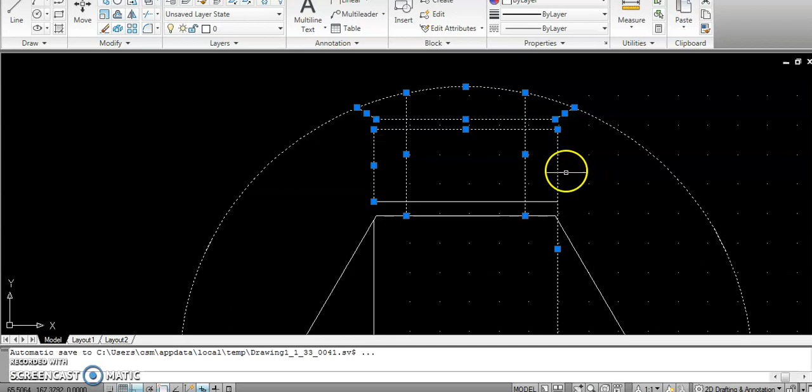So now almost everything we have trimmed. Then here few things are left out. See, this is pole face, right? So this is pole face. Then this also you can remove because we are trimming it, right? Okay, then anything else? Fine. Okay, this is not required. Trim.

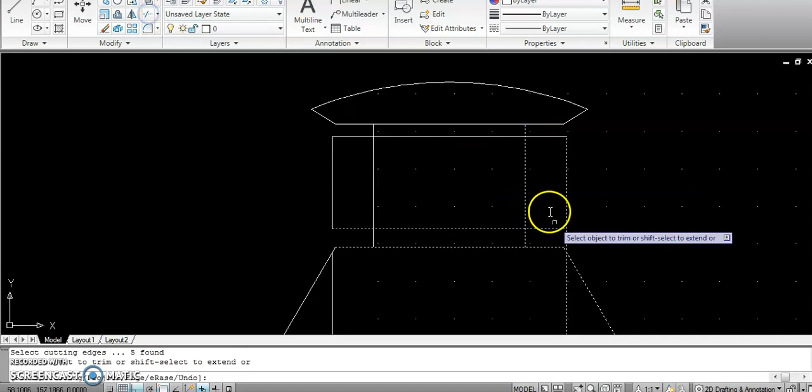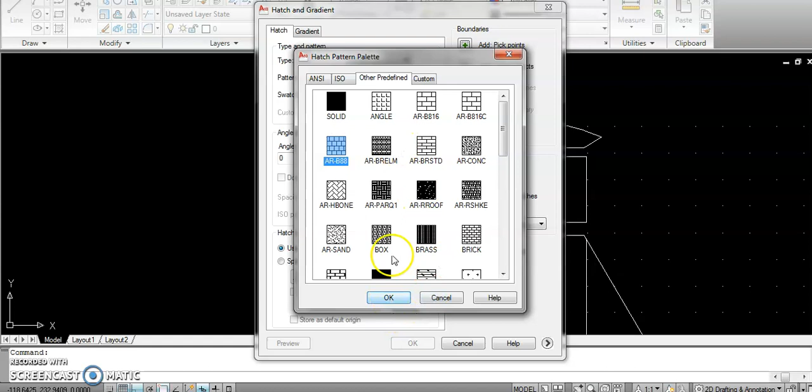Fine. Okay. Next, you can take one different hatch and let us hatch the windings. So any different hatch you can take. Okay. This you can take. Okay, no problem. Then scale some 15. Add pick points. Pick points. Enter. Okay. The scale is very high, I guess. 1. Okay.

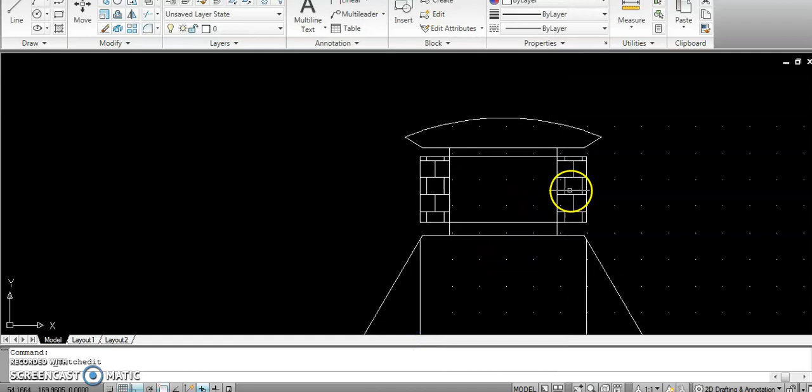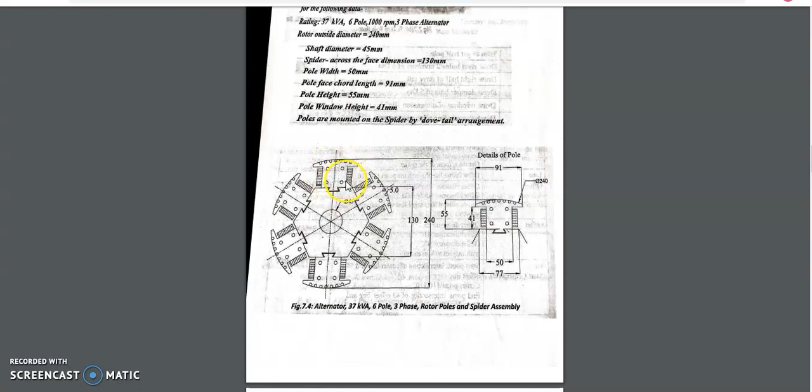Fine. Clear? So you can refer to your CAD file. Where is that CAD file? Now pole face is ready. Now these slots, everything is remaining, right? So this dovetail also you have to do. Dovetail randomly you can do. Okay. Then these are the holes here. This also randomly you can draw. Okay. So on the pole face also you have few.

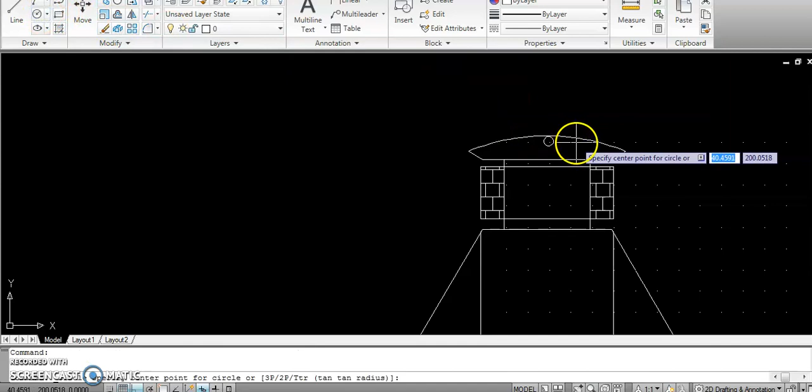This is for damper bars. Usually whatever you draw here will be for damper bars. Now for your kind information, randomly I am doing it. And later, when you draw in scale, you can draw it clearly. Okay. So randomly you can draw few slots. Then here also for riveting.

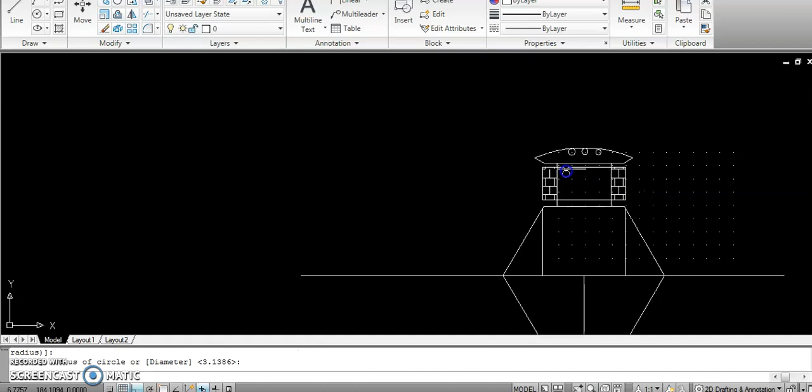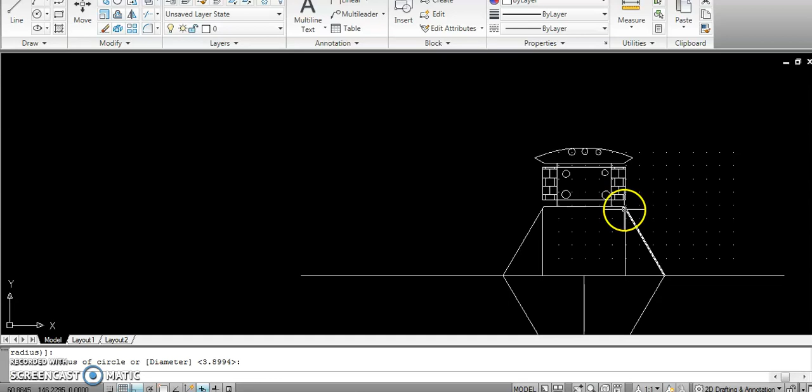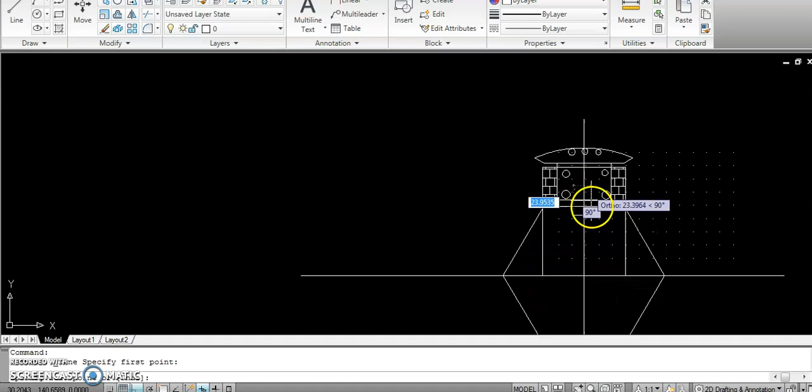Please note that all these should be in same alignment. Because of shortage of time, I am doing it like this. Okay. And next, dovetail also. Dovetail, you know the axis, right? So drawing dovetail is not difficult. Just draw one horizontal line like this. Okay. Then with scale, if you draw, that is well and good. If you are not able to draw with scale, then this also is fine. Okay.

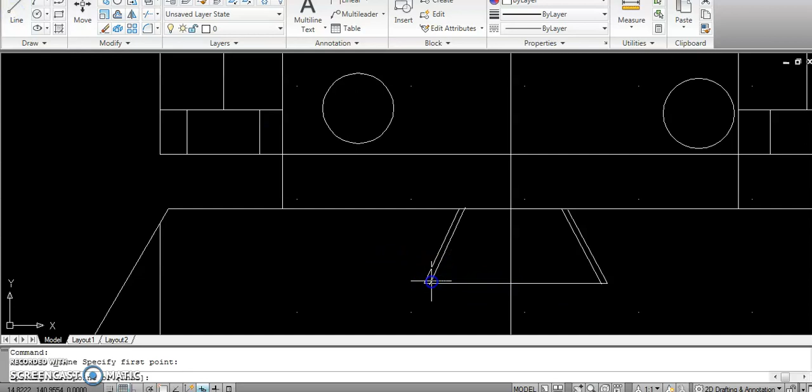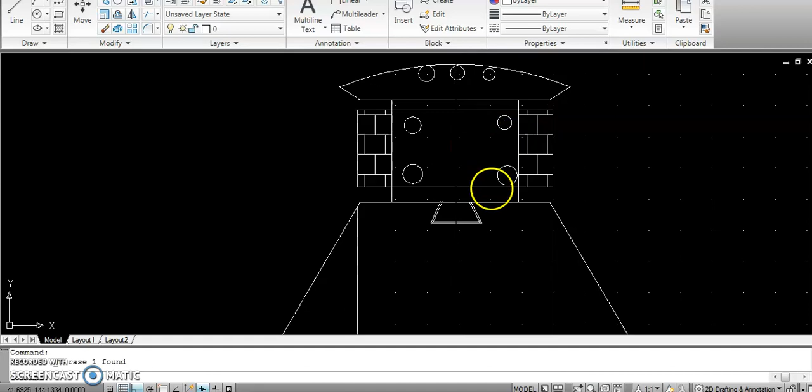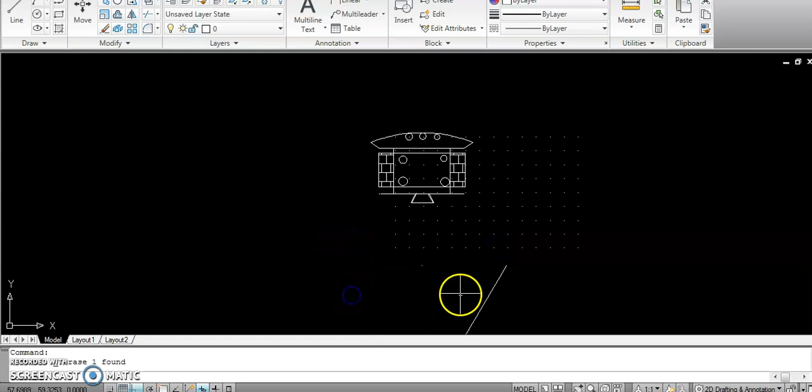Clear. So this is known as dovetail arrangement. Okay, this is how you fix the pole and spider. Using this dovetail arrangement, you will fix that. Now this axis line is not required. Now you can delete everything. Interesting fact, even this also you can delete. See, if whatever you have drawn is perfect, then it will come in hexagon only. So now you keep the center on always, object snap on.

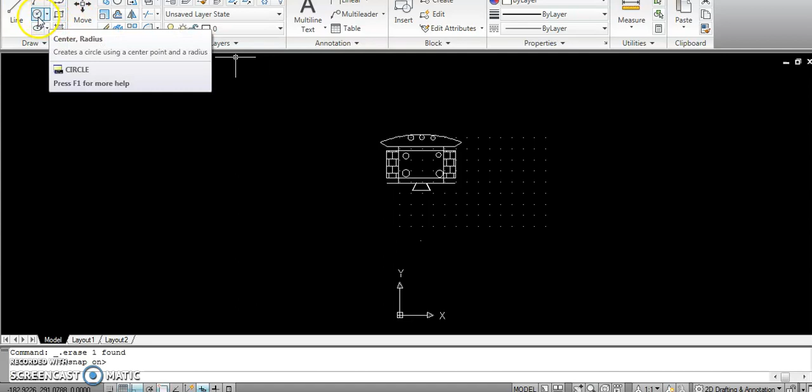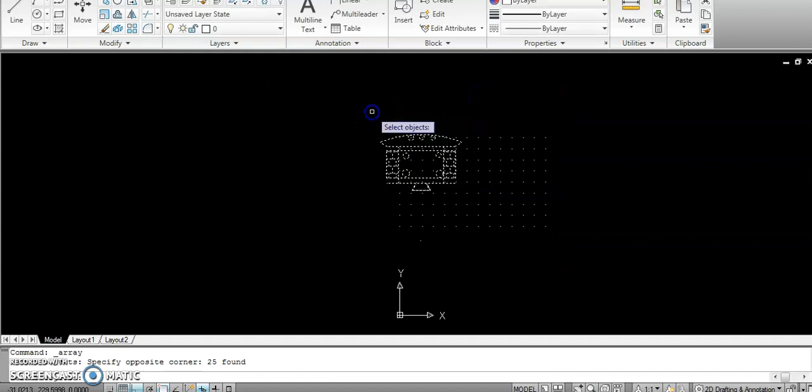Now next thing you have to do is copy this 6 times. So we are doing it polar array. Go to this array. Now how many in polar array? Items 6. Then select objects, enter. Now center point automatically will come because we have drawn the circle, right? The center point of that. Then anything to fill? Nothing, done. Okay, see. Then you can draw the shaft here. This is the shaft. This is how it looks.

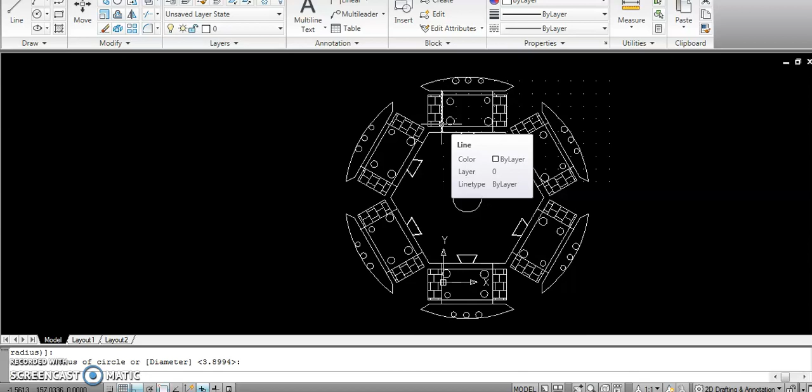Then dimensioning, as I told last class, you have to dimension it. So main thing is you have to draw the spider, then one pole, then you have to array. Almost in all the problems we are using this array command only. Even when you draw the slots, one slot you draw, then you array it, how many numbers you want. So this is nothing but your rotor of your salient pole. Stator will come outside. So next dimensioning you do, that you know.

And one more important thing you have to note: the problems we have shared with you, just relate this dimension and whatever they have given here. First you have to understand the parts. Once you see here, you will understand the parts, then very easily you can draw. So the same thing here. Previously we had 6 poles, the spider is hexagon, but here the spider is something like square in cross section.

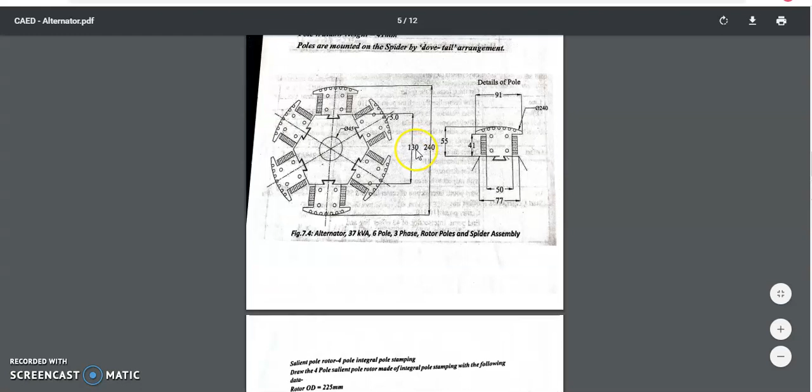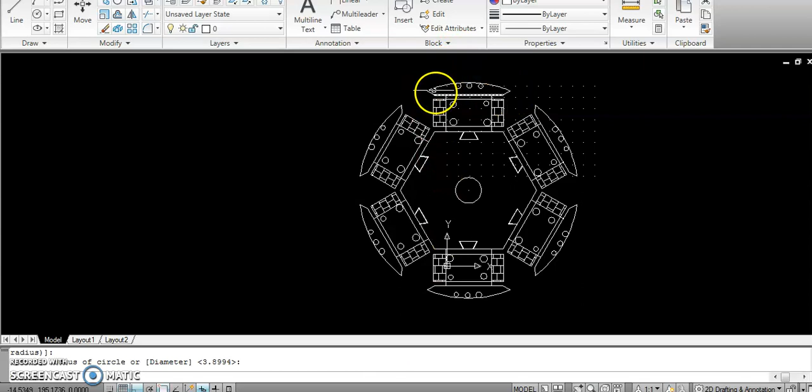Now here, this pole arc they have not given. Here you knew the pole face width. So offset you did, then this point you had cut here. See there in figure, this one. This center line offset, then I marked this point, then I brought it like this. In any fashion you can get it down. Now I got it down directly here.

Now if you see in this problem, rest all the details they are given. Rotor outer diameter they have given, then rotor inner diameter is this one, that they have given, then all this winding details they have given. This everything you can draw. This side somewhere you can draw 22, then 8, then again 22 close, one more 10, then this 29, again 10. Small 2 rectangles you can draw and get it here.

But main thing you should understand is how to get this pole face from here to here, how much to cut, that they have not given. But here they have given some other details like pole arc by pole pitch, pole width they have given, but only that pole face they have not given. Because first you will be drawing this circle, right? So what you need to do is, there is some calculation.

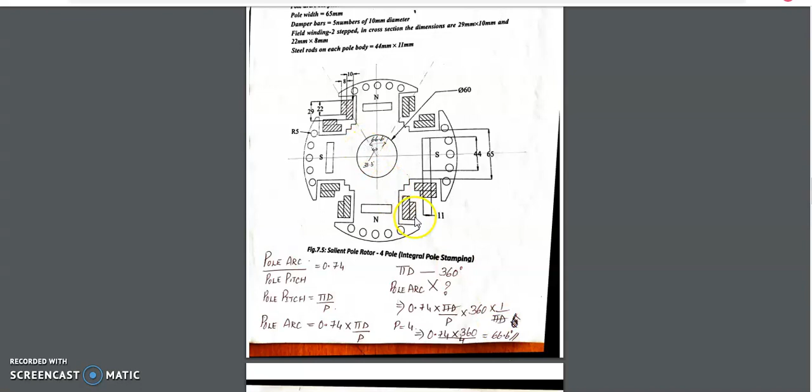Pole arc by pole pitch is equal to 0.74 as given. So pole pitch is equal to pi D by P. This is a standard formula. So pole arc will be 0.74 into pi D divided by P. So pi D is 360. Number of poles also he has given, that is P equal to 4. So if you substitute here, you will get 66.6. This is nothing but your pole arc width.

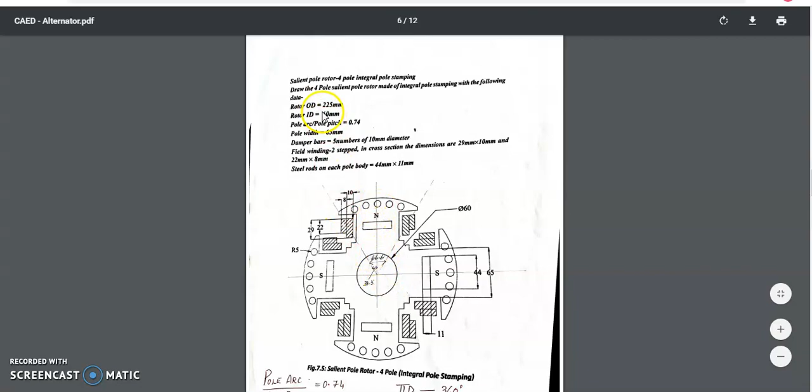So you need to measure an angle of 66.66 between these two lines. So I will draw. If you want to draw, you can draw, no problem. So first I will take this rotor outer diameter. Before that I will delete this. So rotor outer diameter is 225 mm diameter. Okay, so circle, diameter 225 mm. So inside this it should come. As I told, first thing what you need to do is axis. This is very important. This is only for your reference.

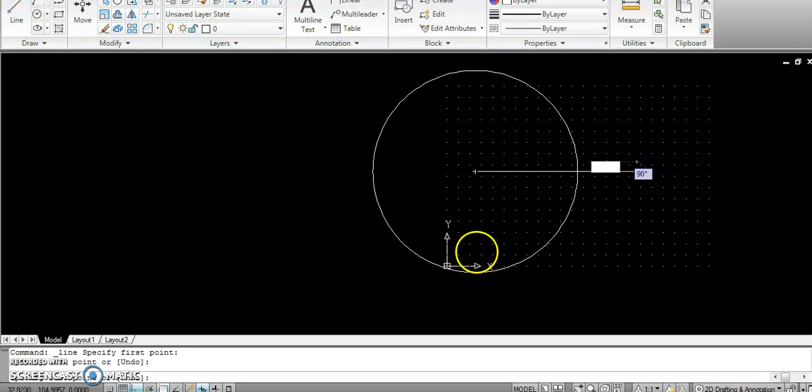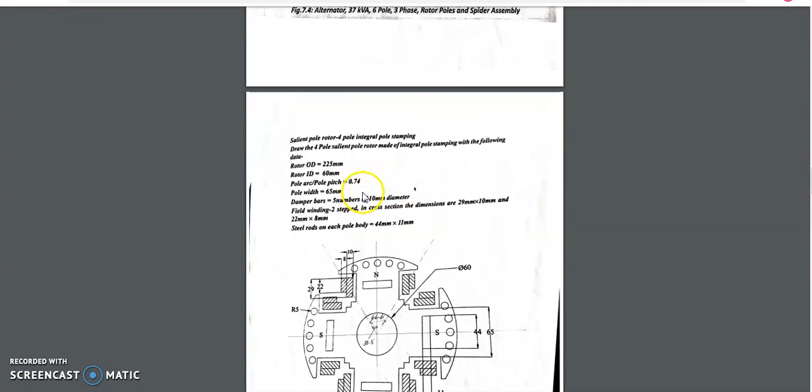Now pole face you need to draw, right? For that angle you need to give. The calculations I told you, right? From here to here it is 66.66. To do this calculation you need this number 0.74 and number of poles. In some problems the poles they will not give. That time you can assume it to be 4 or 6, but this 0.74 they have to give.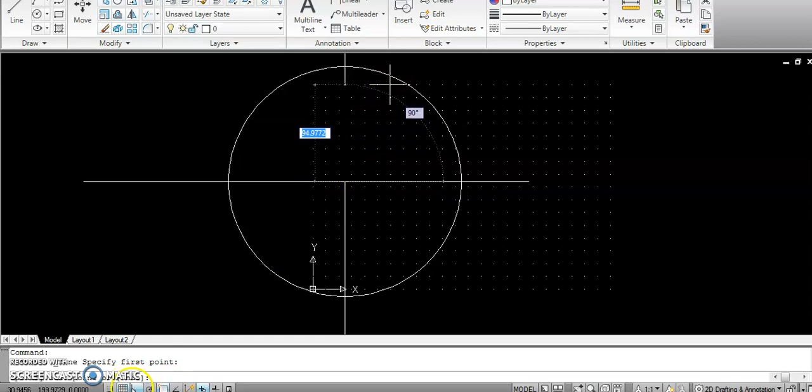Now to draw a line with an angle, for that you better keep this dynamic input on. Line, specify first point, then you need to give this angle, right? How much is that angle? From here you need to draw. Pole face from here to here is 33.3. Total it is 66.6. From this midpoint it is 33.3. So you do one small calculation: 90 minus 33.3.

Madam, could you please check that? 33.3.

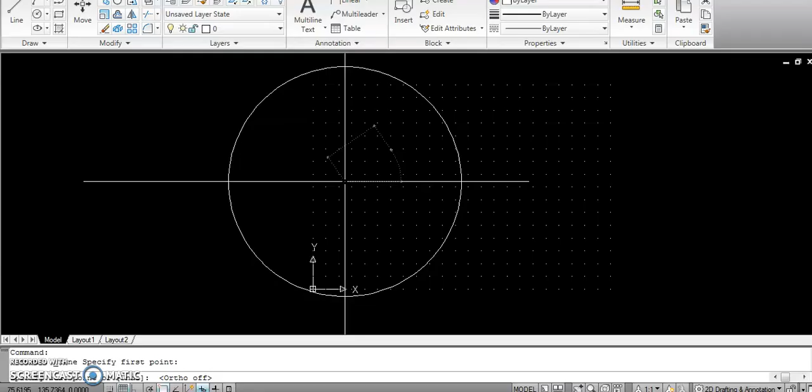It is 56.7, right? So from here to here it is 56.7. So in that CAD file, angle 56.7. Same thing, this side also you need to do. It is taking the angle from here. So 90 plus 33.3 is 123.3. From here to here it is 90. From here to here it is 33.3. This is what we found out, 66.6. So from here to here I drew first.

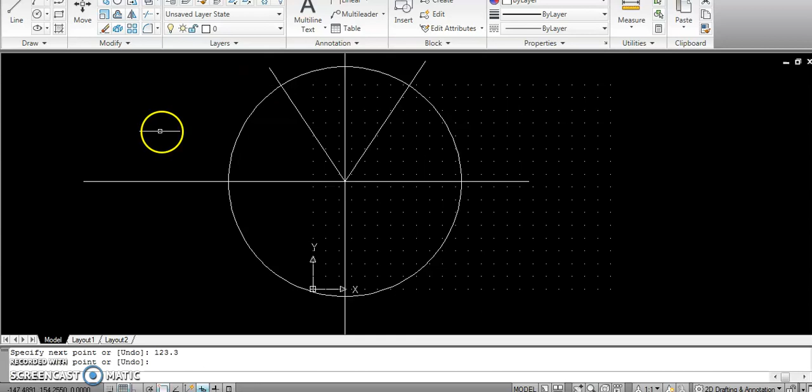Now with respect to this horizontal line, I have to draw 123.3. When you keep this dynamic input on, it is coming. 123.3. This first one indicates the length of the line. Second one indicates angle. If you press tab, it will go to the second one. So this is your pole arc. Next you know what to do. You can get it down.

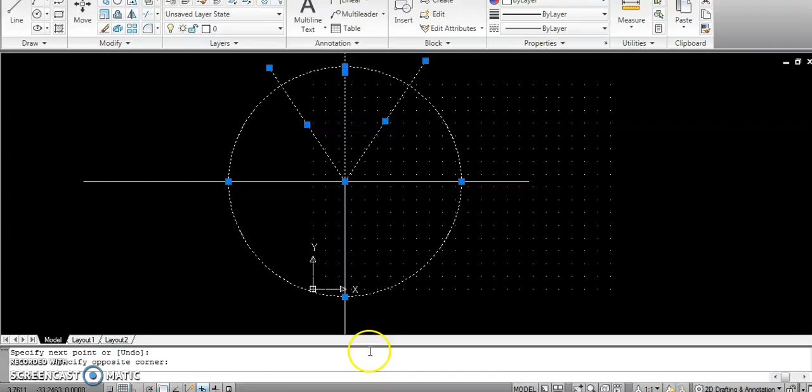Now you came to know from here to here. Next you can trim the rest of the parts. Select everything, you can trim this. Because next you are arraying it, this is not required; when you array, this also will come. Next pole width. Width of the pole is given, I think 65 mm. So 65 divided by 2 is 32.5. So from here 32.5, from here 32.5.

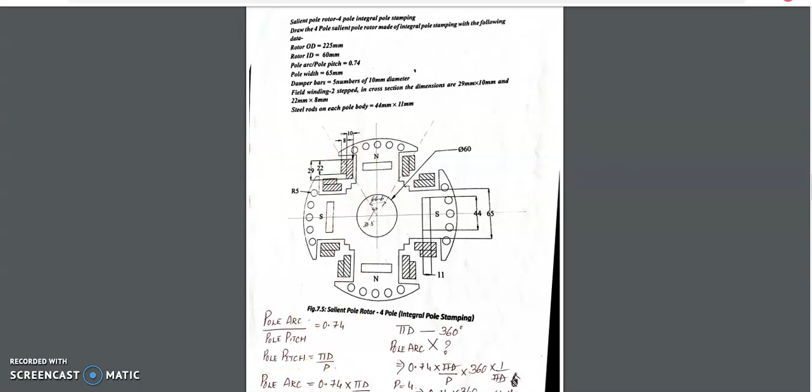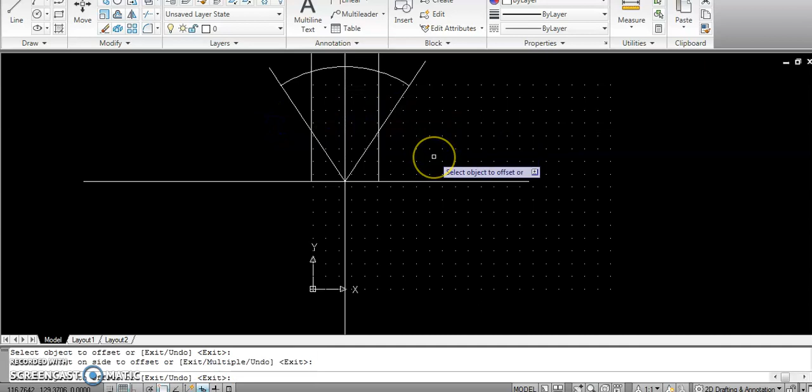Offset command, distance 32.5. Select this, keep it right side, select this, put it left side. Done. Pole width is done now. Now you need to join this. Directly you can join, because window height and all they have not given, so you can assume here. In the problem itself they will tell missing data can be suitably assumed.